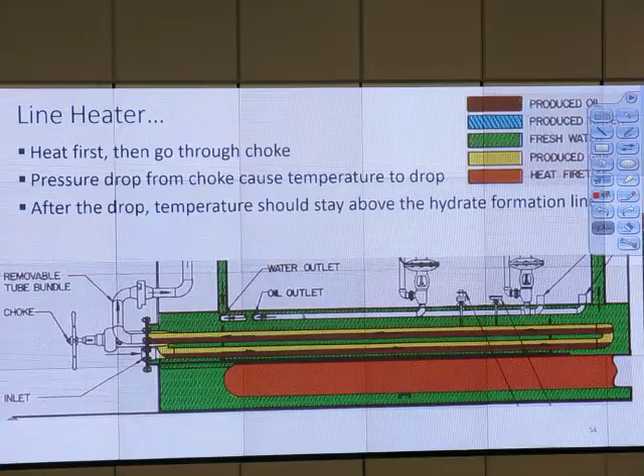So heat first, then go through the choke. If you say choke first, that's wrong. Pressure drop from the choke causes temperature to drop. After the drop, temperature should stay above the hydrate formation line. Some type of line heater lets the hydrate form a little bit and melt the hydrate. I'll show that.

What's the advantage of this one? I think after we do the calculation, you will see which one is cheaper and buy that one. At the end, I don't know for sure what's the advantage. The example from the textbook says do one calculation and another calculation and select the cheapest one. Do you have anything to add? Is that better?

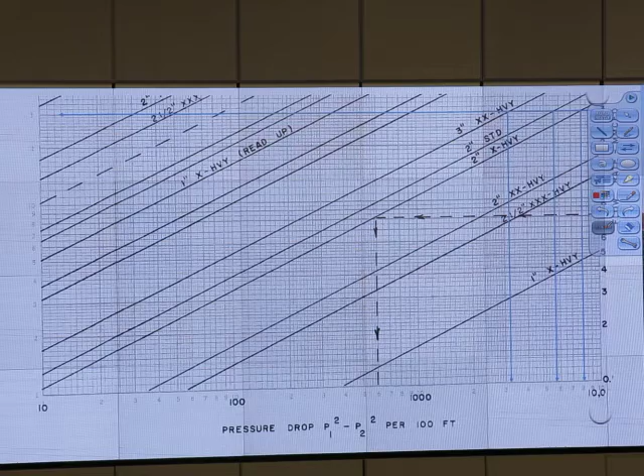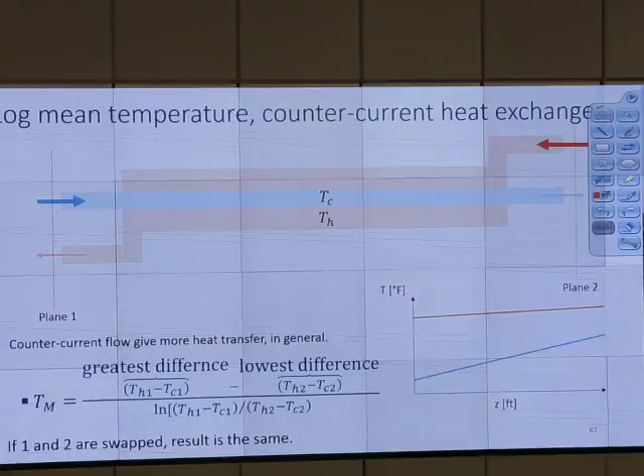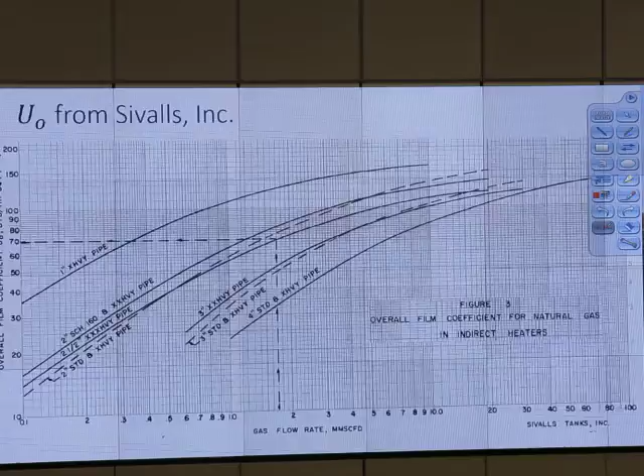Sometimes you'll take a pressure drop, especially with a high pressure well. You won't want to take all that pressure drop through one choke because of erosional velocities. So you take enough of a pressure drop where you can go through that expensive heavy wall pipe at high pressure, then take a drop. Now you're working at a lower pressure, and you put a cheaper second pass of coils in there, and that second pass is heating it up, taking further pressure drops that you're going to have in your process system as you go through.

So we can choke, not at one time—multiple chokes. Yes, good for multiple chokes. You may have a choke at the wellhead even prior to heating to drop some of the pressure. Any place you drop that pressure, you're going to reduce the pipe size or pipe pressure rating you're going to have. So you can drop that pressure rating some at the wellhead without hydrate formation, take it through a coil, heat it, and take either your final choke or a second pass if you're going to anticipate additional pressure drops through your system somewhere later.

Do you have to account for extreme weather when you're heating up fluids or pipe? We can select the best option, but I skip all that calculation because they complain it's too difficult. We can account for that for sure if you want to. To account for that, we have to do a heat transfer calculation—like if the wellhead is 100 or 200 feet away, what should be the temperature once it reaches this point? There's some kind of calculation to show whether the temperature will drop below hydrate temperature or not. Most of the time, you just bury the line and it works.

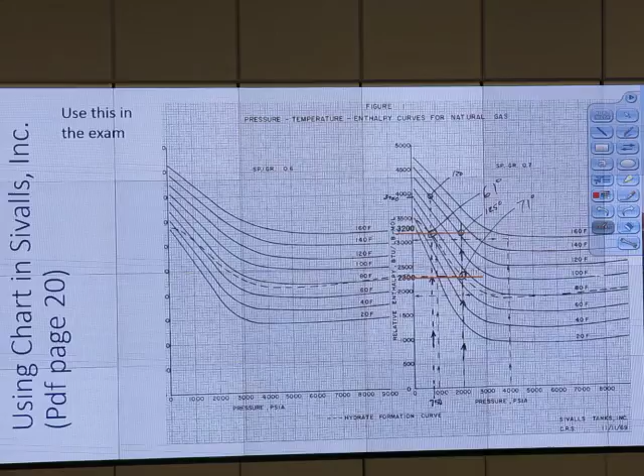This is the approach they use to do the calculation: just assume no pressure drop, and then go back and use that chart. So we know the shut-in pressure, then we can start at one point. The inlet pressure is assumed to be the same as that pressure, and the pressure at that point is assumed to be the same as the pressure at that point, and then do the calculation.

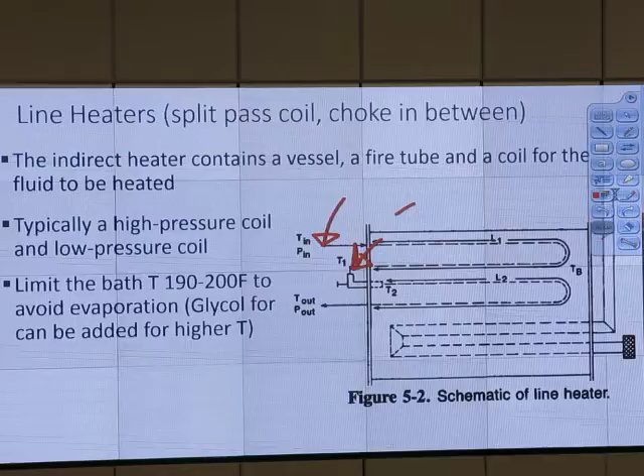L1 pipe diameter is smaller than L2 pipe diameter due to gas velocity. What is this about? Why, Eric, what is that? Victor, why should we do anything like that? L1 pipe diameter is smaller than L2 pipe diameter due to gas velocity. So Victor, when velocity goes up, does it make noise?

Yeah, it may make noise, right? If we have a little bit of sand at higher velocity, we will erode the pipe more.

Go get her name. What's her name? Give her the sheet, it says there. Are you in this class? Probably not.

No, okay, it's okay. So for the velocity, if we have a little bit of solid particle, Victor, what do you think happened? So that particle, should it hit with the pipe wall? Right? It should hit with the pipe wall.

So who else wants to get an A plus? Who wants to get an A plus? Savib, is that your name? Yes. Okay, what do you think when we have solid particle?

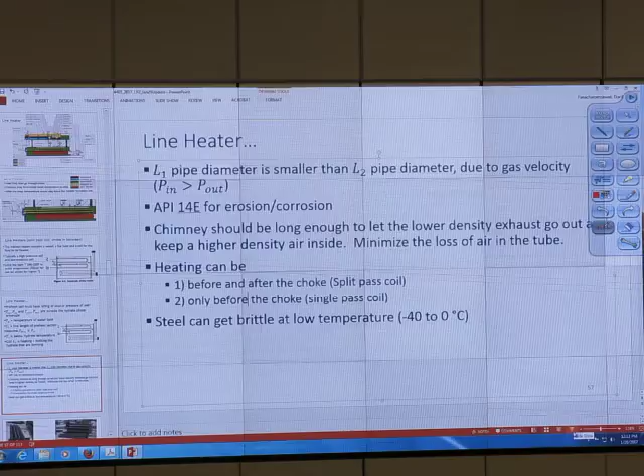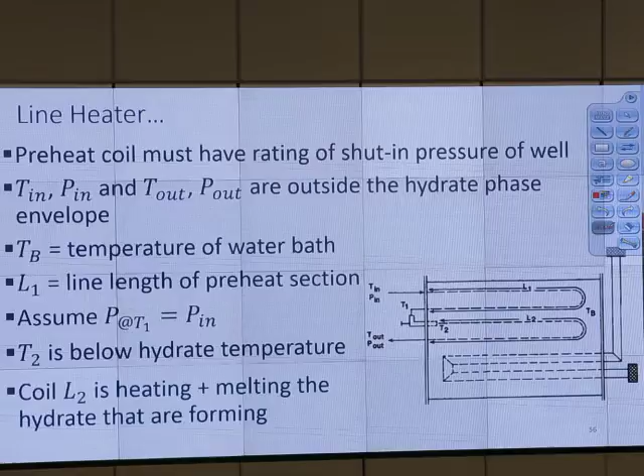In the Sivalls textbook, it's discussed something about only after the choke too, but they said don't do that because it may plug or something. It's not good to choke it first and make it plug and then melt it, because you see the choke, there's some part over here that you may not have enough time to melt it, so it's not good. So heating can be only before the choke, not after the choke. I correct it, and you correct it too, okay?

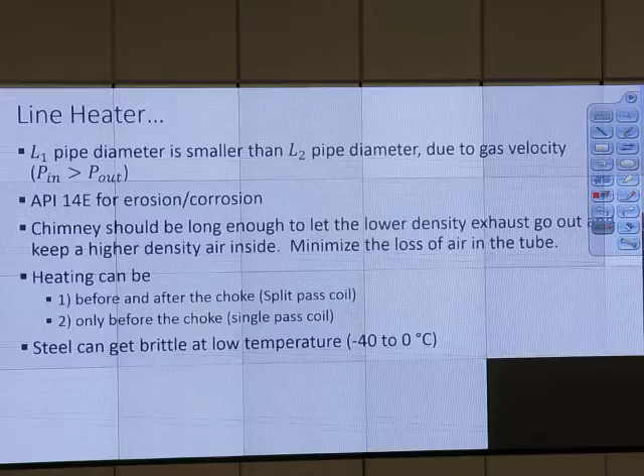Steel can get brittle at low temperature, minus 40 to 0 Celsius, but we should not go that low anyway, right? Because we will form hydrate.

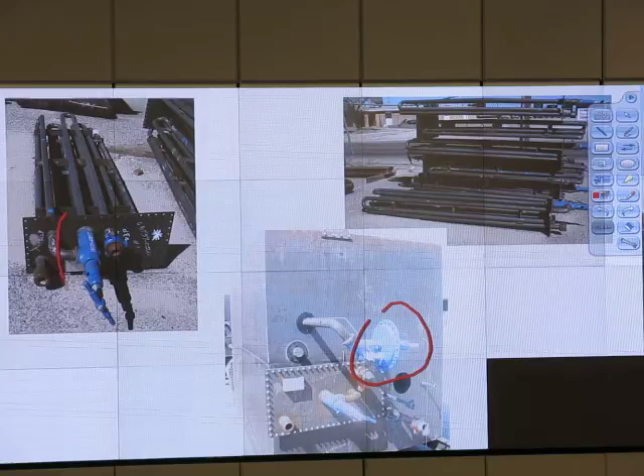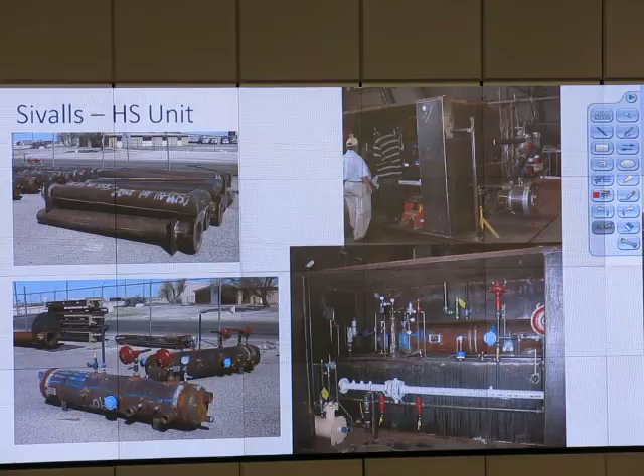Okay, looks like this, so that is the choke. That is the choke, okay. So this one, that one is the choke, and we have the coil inside. See more at the field trip.

Now we want to know the size, how big should it be? At the end, we want to buy the right line heater. We don't want to buy a line heater that is too big. Let's take a look, what do we need when we buy the line heater?

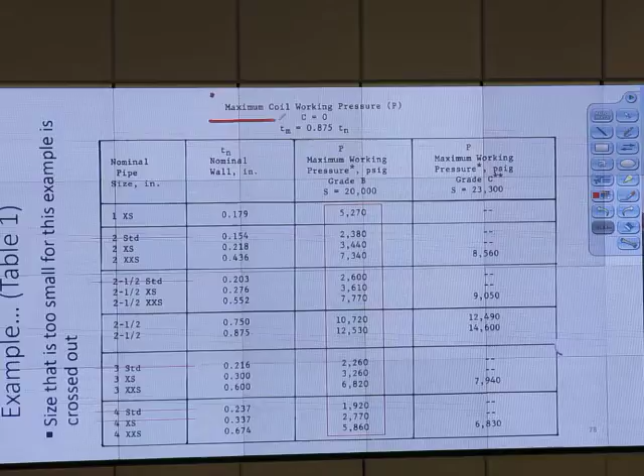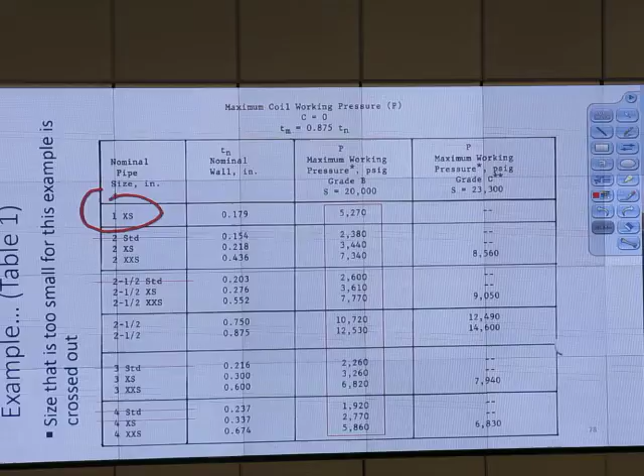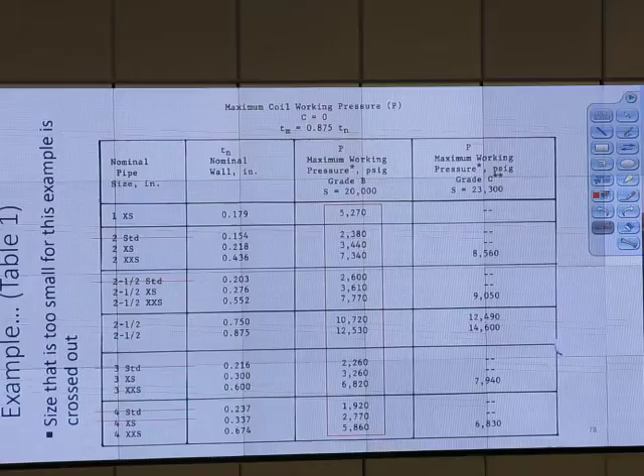You see this, maximum coil working pressure. So we want to know how big is the pipe or coil that is inside. Is it 1XS? Standard, I think, is schedule 40. XS is schedule 80. XXS is schedule 160. Okay, and we will have to tell this one.

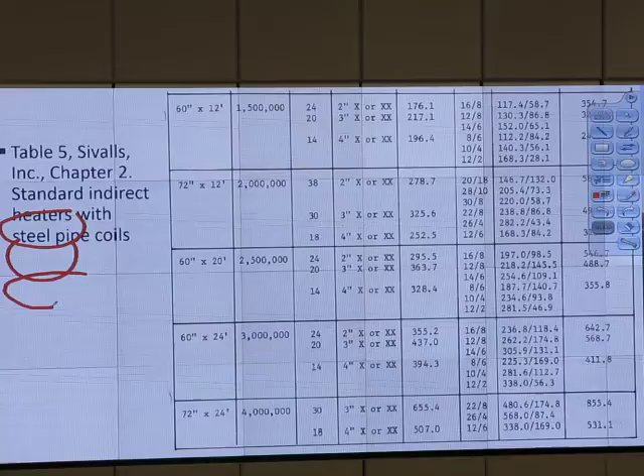So when you call Sivalls and say you want to buy a line heater, they want some information from you because there are so many options. Do you want to buy 24 inch by 3 feet? Is that the size you want? Or you want a bigger one, like this, 24 feet? 24 feet is quite a lot, and 72 inches. Do we want to buy that one? A very big one, or you can go with a small one.

We don't know. We need to know how much is the firebox rating that we need in BTU per hour. Do we need 100,000? Is that enough? Or do we need 500,000? We need 1 million. They want you to buy a bigger one, of course, because they make more money that way.

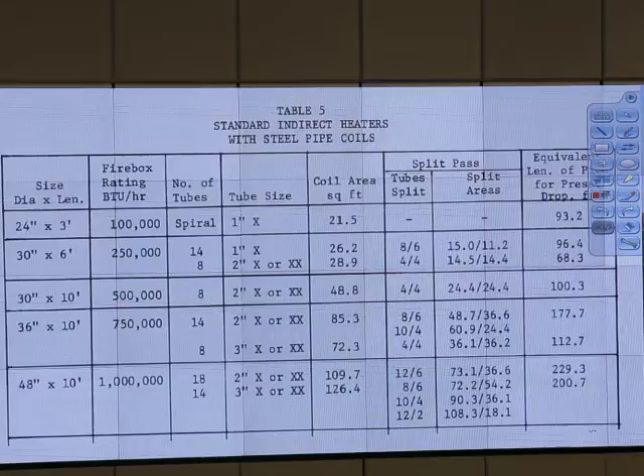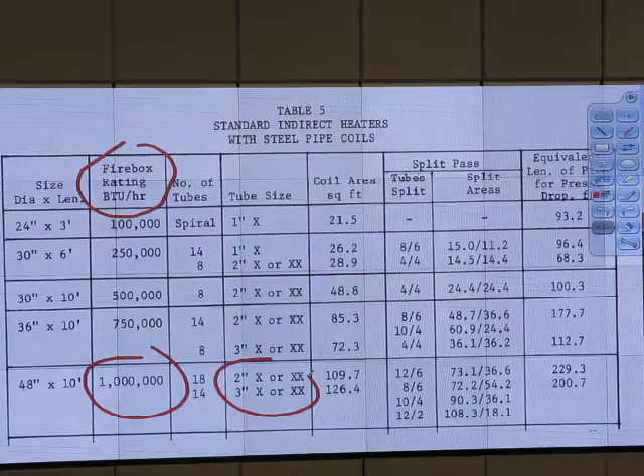Okay, very clear right? So let's say we know firebox rating is 1 million BTU per hour. They will ask you, do you want 2 inch or 3 inch pipe? So if I have a bigger pipe, there are several options: 2 inch, 3 inch, 4 inch. They will want you to buy the biggest pipe possible because that's more expensive.

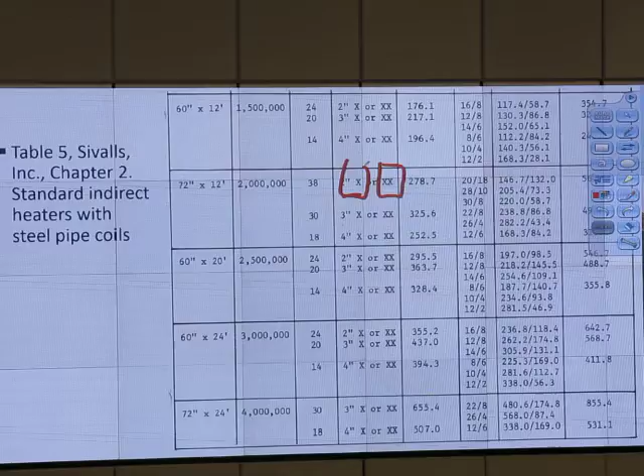They want you to use X rating or XX rating. You see, X and XX, schedule 80 and 160. 160 XS is thicker wall, and more expensive. We don't want to buy it, but if we need it, we want to buy it. How do you know that you need it or not?

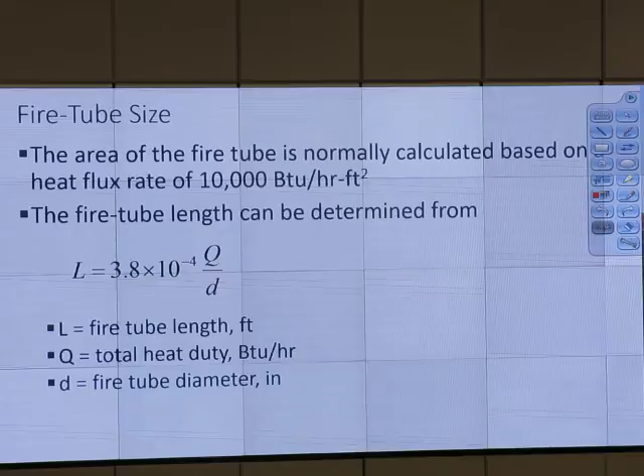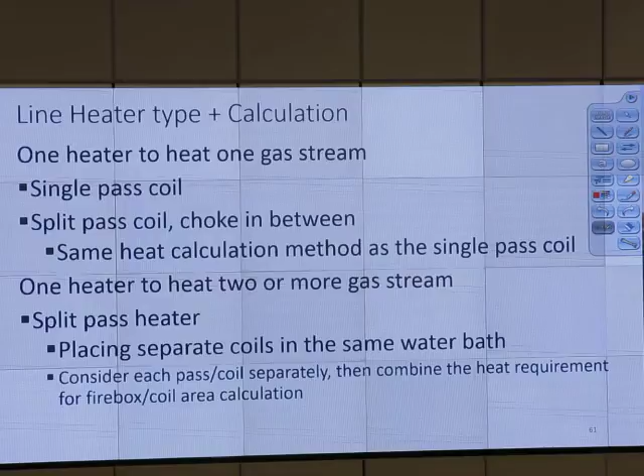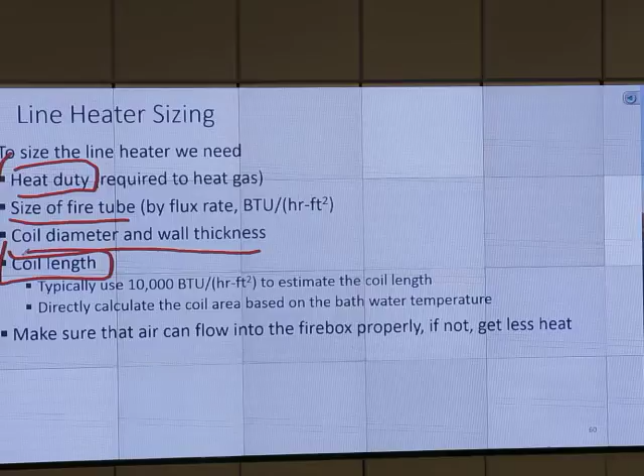We need to know heat duty, I'll just show you how many BTU per hour. We need to know size of the fire tube, coil diameter, and wall thickness - X or XX or standard. We need to know coil length; they provide several lengths of coil. That's the way to do the calculation for coil length. 10,000 BTU per hour per square feet is used to estimate coil length.

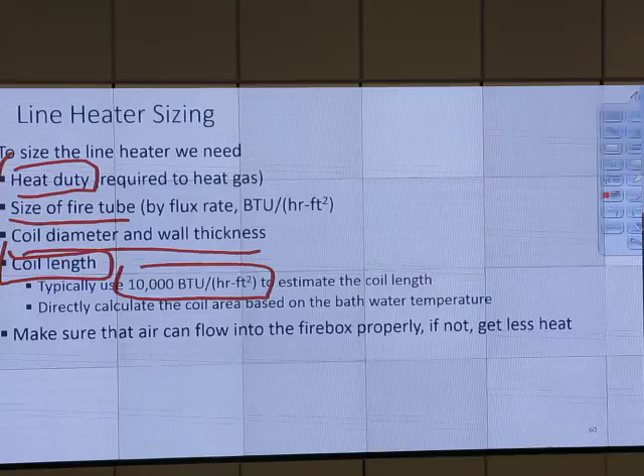Ashley, what is this? BTU per hour per square feet. I'm not sure, is that heat flux? Amount of heat? Heat duty? What do you call this in English? I don't know, or you want me to call it Thai or something? That is heat flux, heat per time per area - amount of heat per unit time per unit area.

Ashley, what is that in SI? Chris, what is that in SI? Watt over foot square. Oh yes, I see, meter - watt per meter square. Very good. So the unit will be in the exam.

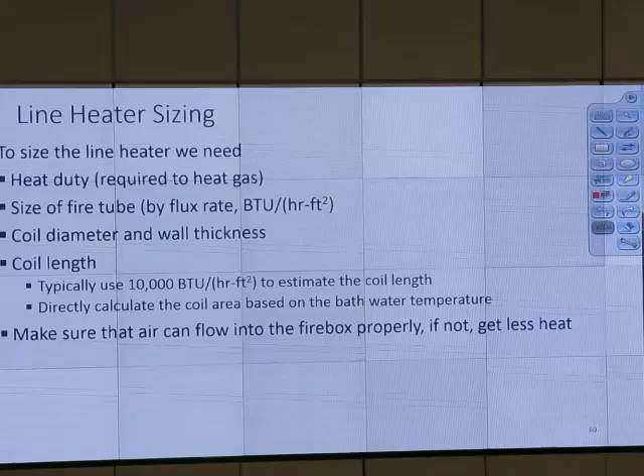Okay, last thing to ask you. During the calculation, you will need to know some kind of specific heat capacity - specific heat capacity of water. What is the unit for specific heat? CP, C sub P, specific heat capacity.

Have you ever heard MCP delta T equal to heat requirement or something? Yeah, that sounds right. So specific heat capacity is the amount of heat required to raise the temperature of water by 1 degree, for 1 kilogram. The unit is Joule per kilogram per Kelvin. In field unit it will be BTU per pound per Fahrenheit.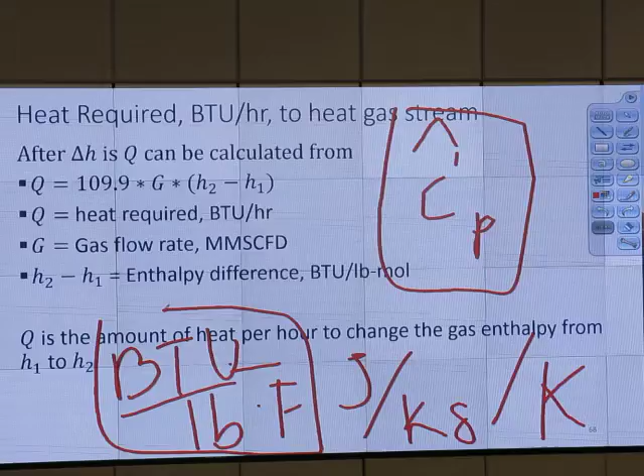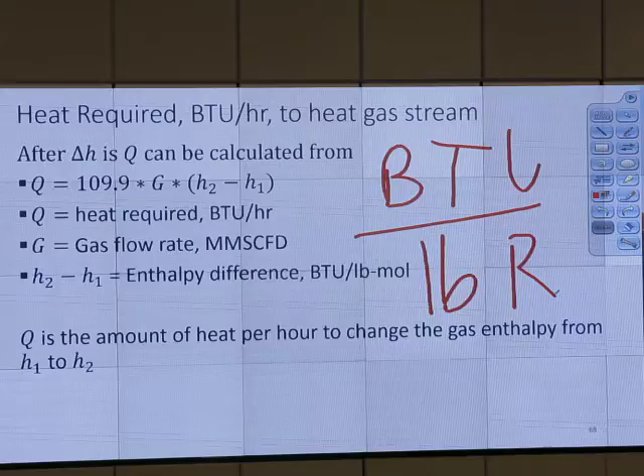So before you go, I want to ask you this question, and we will talk about it more next time. How do I change from BTU per pound per Fahrenheit into BTU per pound per Rankine? So I want to find out who wants to volunteer to do something. Victor - okay, tell me next time what is the specific heat capacity of water in the unit of BTU per pound per Rankine. And Victor, you will tell me how to do the unit conversion to BTU per pound per Fahrenheit - how to change from Rankine to Fahrenheit.

Oh, it doesn't change? Okay, we'll talk more next time. So you tell me the number, how much is the specific capacity of water in that unit.